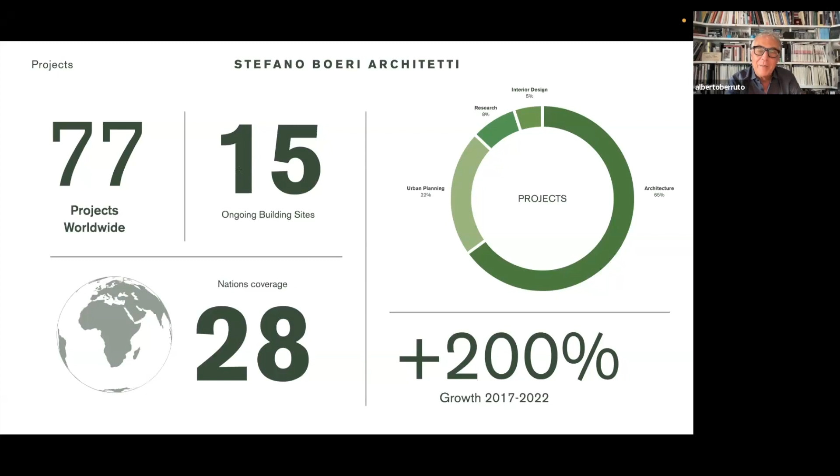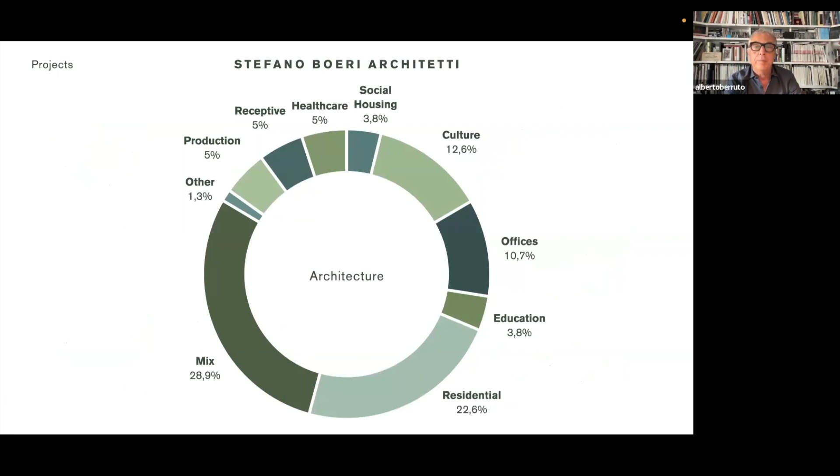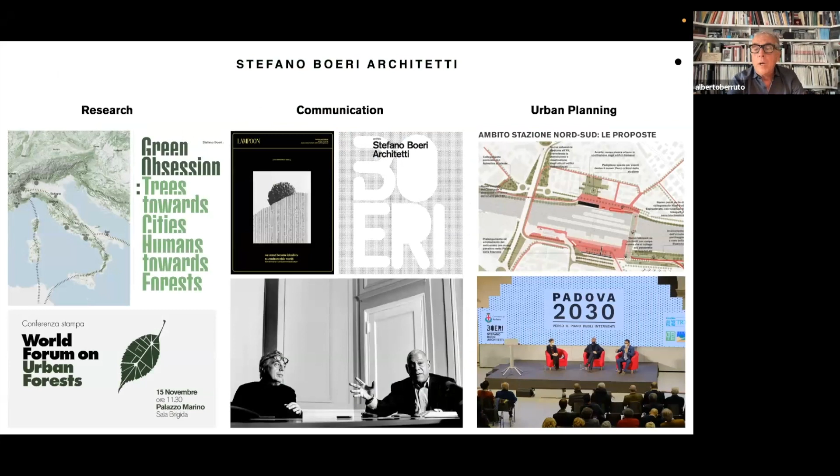Basically, all what we have done in the last years is in a certain way influenced by what we are used to call a green obsession. That means, in other words, that we are in a way obsessed by the idea to put together the urban sphere and the natural sphere. This is why we have developed projects, proposals, master plans, and also produced several research projects in this field. And this is why also, thanks to the publication of a book like Green Obsession, which was just awarded by the Sustainable Development Goals of the United Nations, we are trying not simply to introduce this necessary marriage between living nature and architecture in our theories, but also hopefully in our practices.

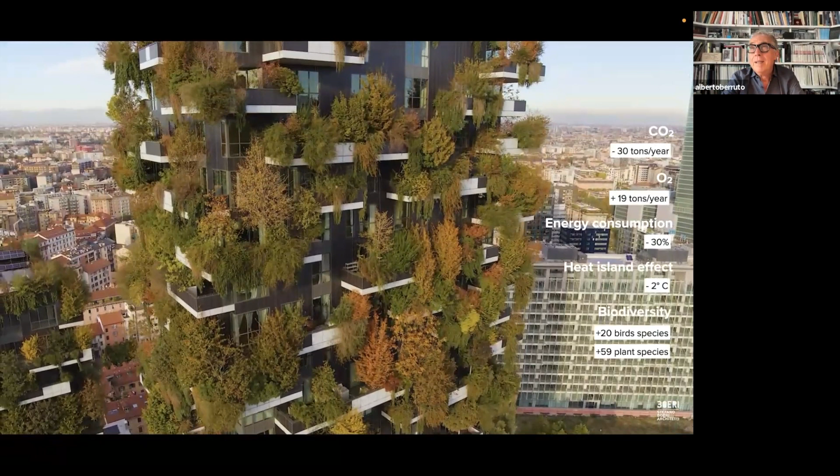Probably the most known project of this approach is the vertical forest in Milano. It's a building we built about 9.5, 10 years ago. But the first plants were moved from the botanic nursery to the construction site 12 years ago.

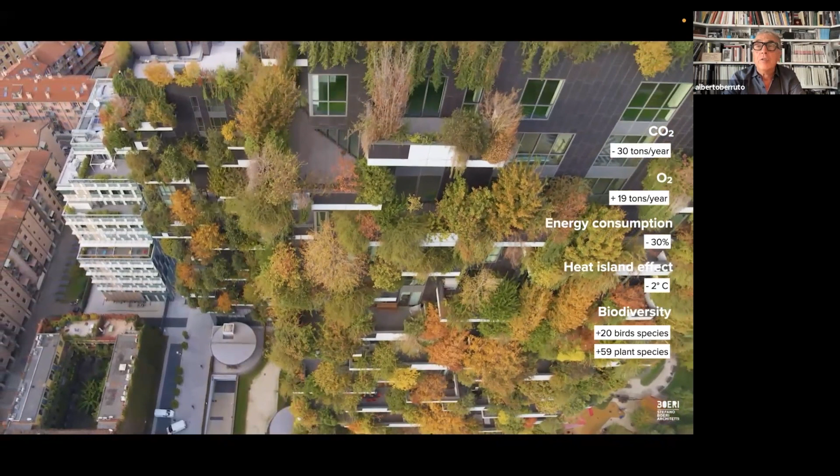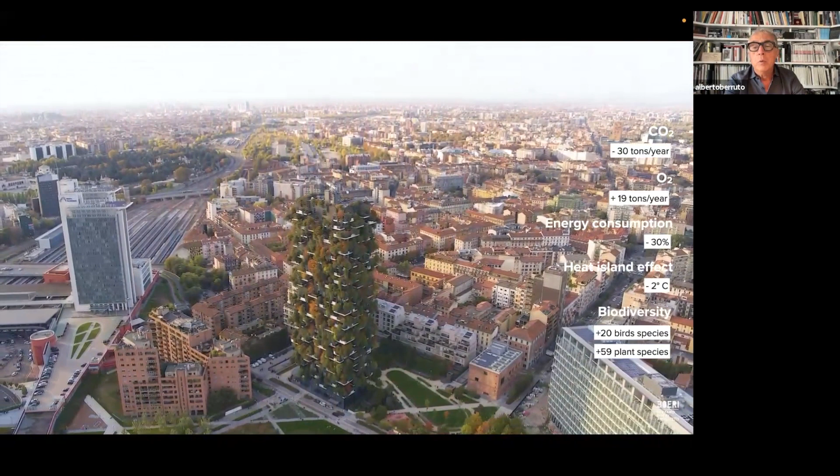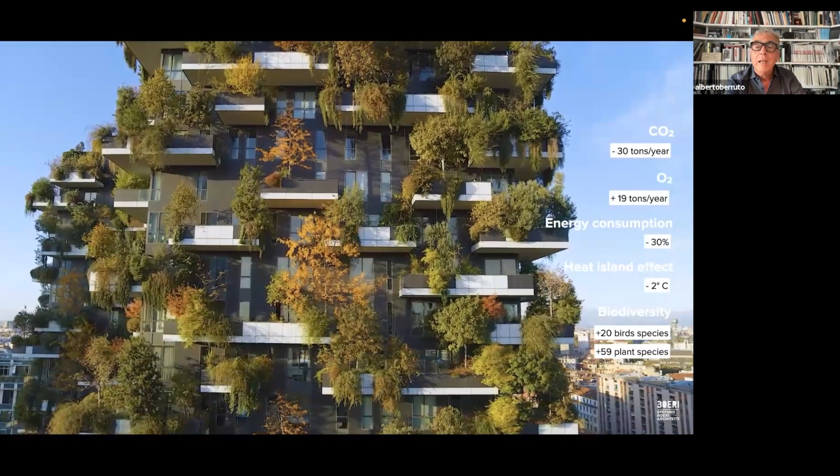That means that we have now a quite important case study where we verify and test all the experiments and improvements that we are experimenting with, in order to introduce evolutions and sometimes steps forward in the other vertical forests we are realizing as part of our work. So this building, as you know, is hosting basically 21,000 plants, more than 900 trees and shrubs of different species, and more than 30 different species of plants and trees.

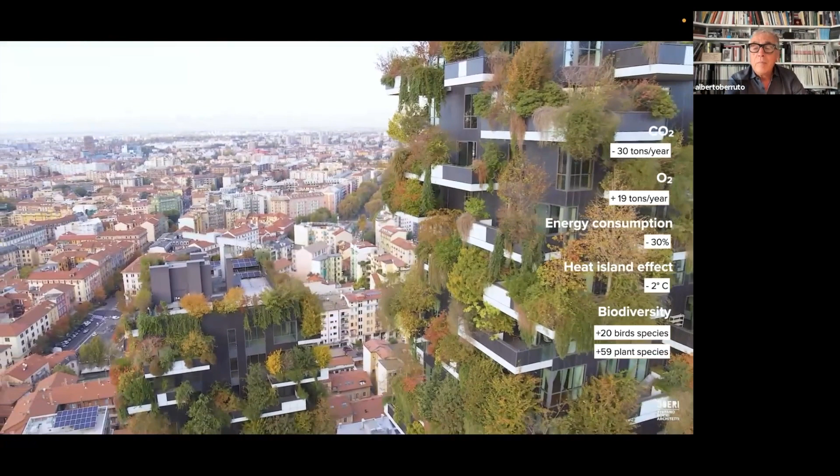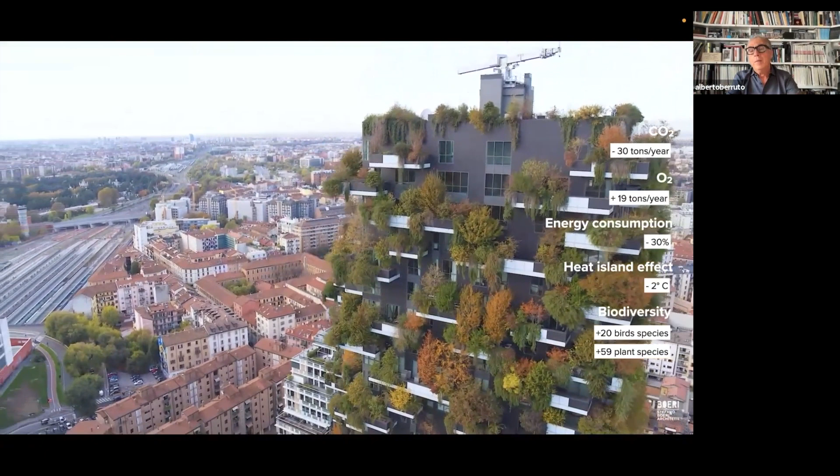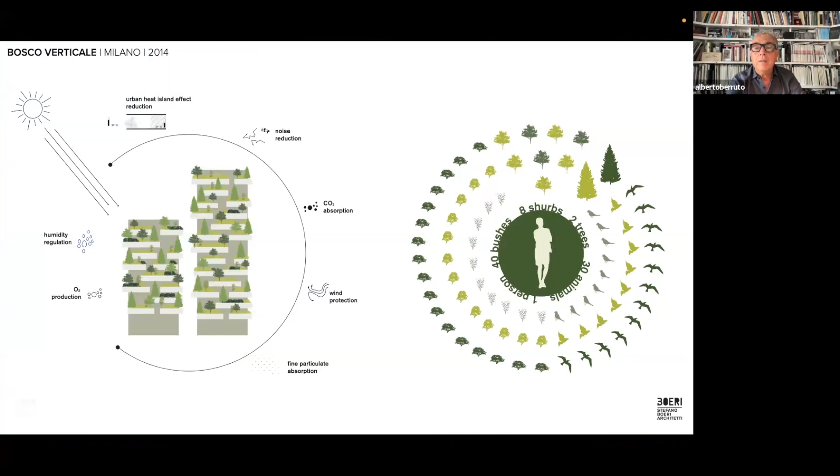And it's a building that also uses the water that comes from the underground city, and thanks to a system of very sophisticated water management, it can use a system of irrigation that at the end of the cycle puts the water back into the underground. It's a building which has many other characteristics that have also been appreciated by, as I was saying, the manifesto of the Sustainable Development Goals by the United Nations.

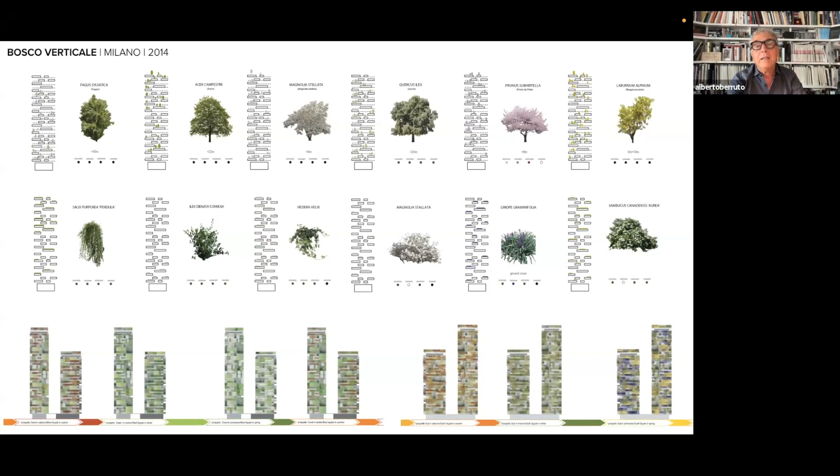And basically, it's a botanic garden. So what we normally do is select the species of plants in relation to the specific climate conditions of the site. And only at that moment, once we have selected the species, we start to design the facade of our building, trying to put all the plants in condition to grow in the best ways they need, and trying to respect their evolution trajectory.

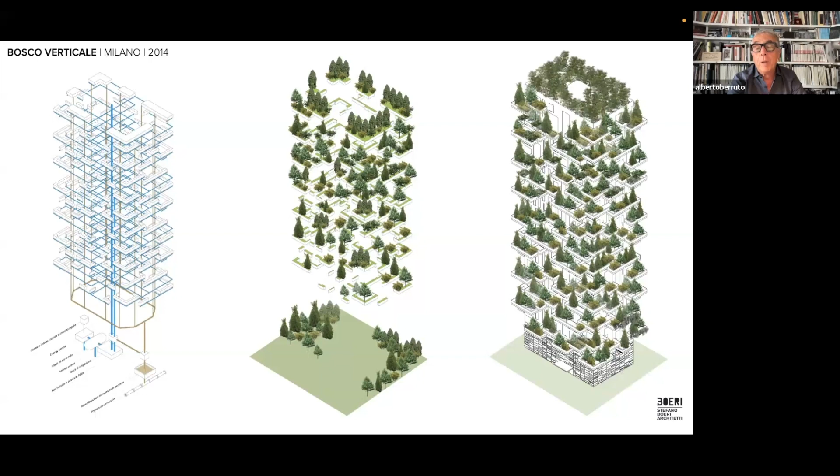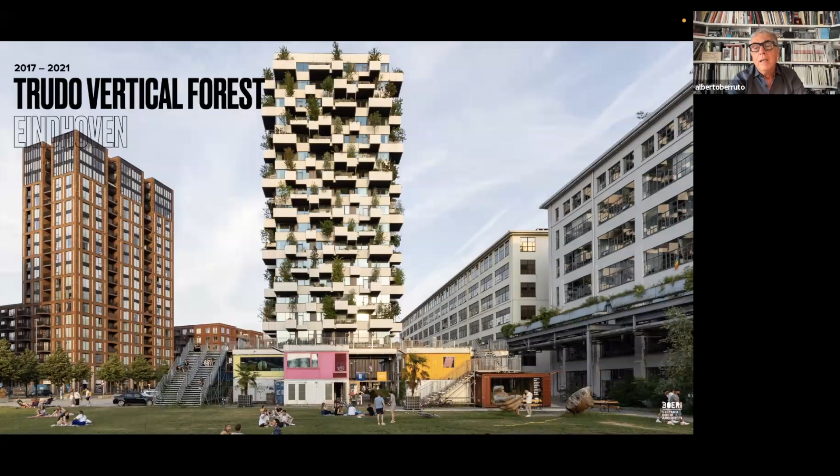This is more or less where we are now, realizing other buildings or settlements that have the same kind of character. One of the latest is this vertical forest we built 2 years ago in Eindhoven, Holland. And what makes this building so important for us, we are very proud of that, is that it is a social housing vertical forest. So it's a building for rent.

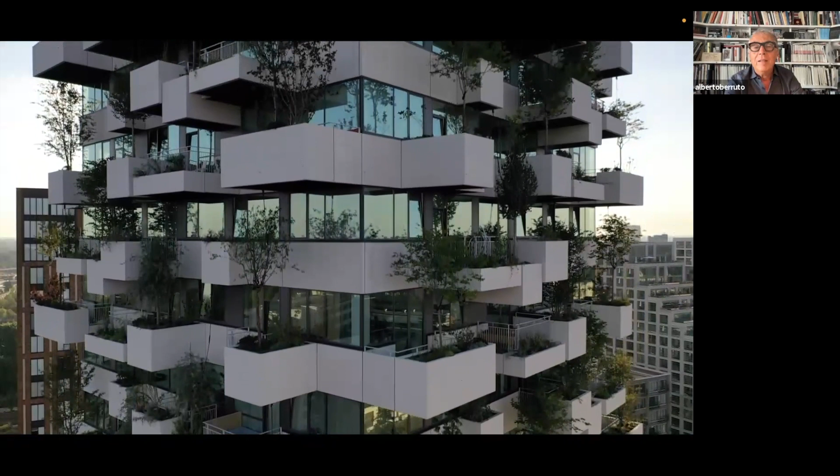It hosts more than 200 students. And the cost of renting an apartment is very low, and the construction cost is very low. So thanks to prefabrication, which we learned thanks to this experiment, this case study, we use it to consider our architectural experiments. Probably this makes our profession so intriguing, and also what we do so amazing, from the point of view of the risk that we take, but also the pride in the result. And that is a building that has, for the first time, introduced a very important number of trees and plants, but with a drastic cut in the construction cost of the building.

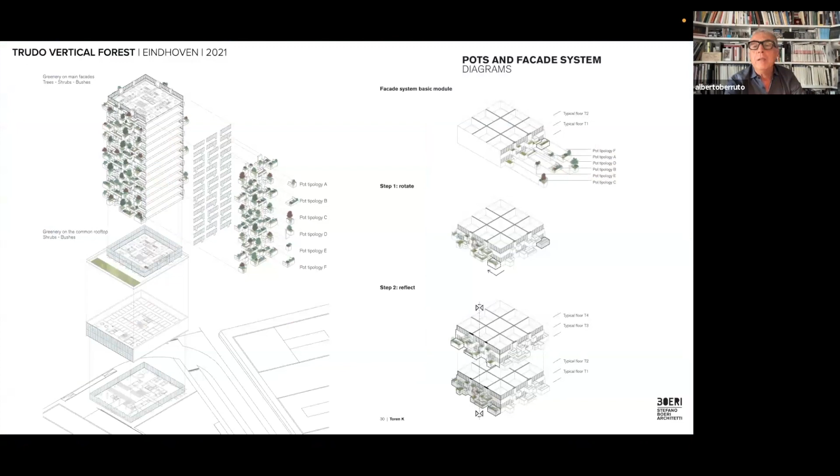You see here some diagrams showing how the building works and the distribution of the system of apartments all around. And it's so great to see how students decline the interiors according to their own desires and expectations, while conserving this relation with the external place.

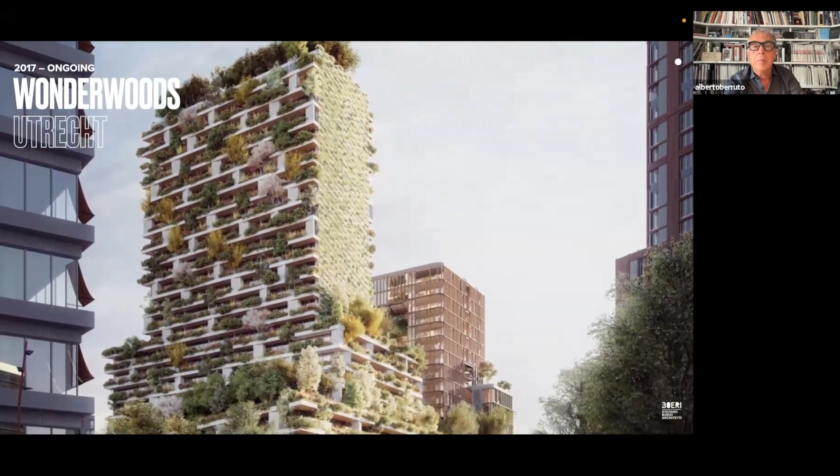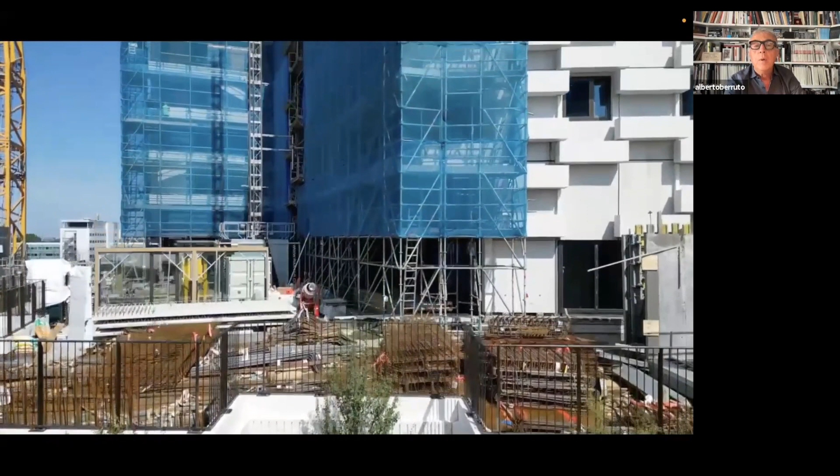That's another building which is in construction, not far from Eindhoven. We are in Utrecht here, and this is the building in construction. This is already built. Also in this case, you see the variety of species that we are introducing. What makes this building interesting is that it is a mixed-use building with a very important variety of functions. So the basement is commercial, then we have office building, and then different kinds of residential apartments, and that's again the building in construction.

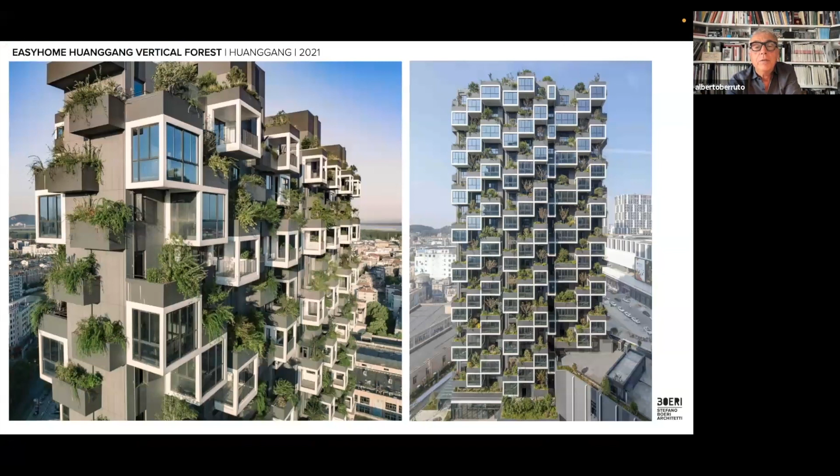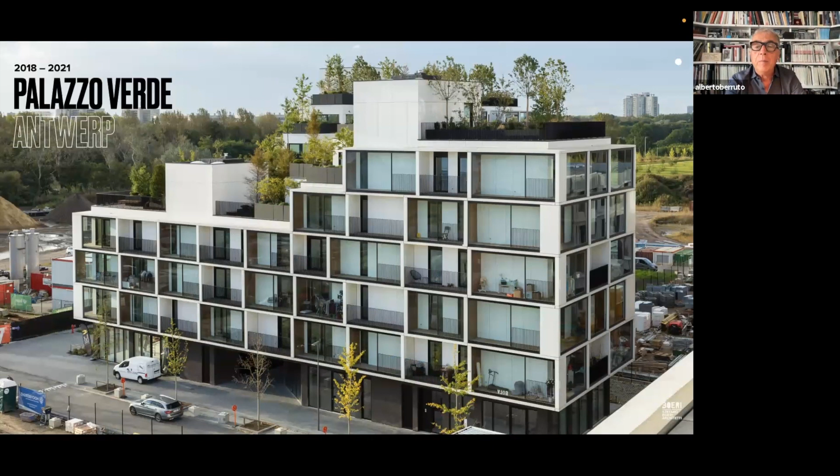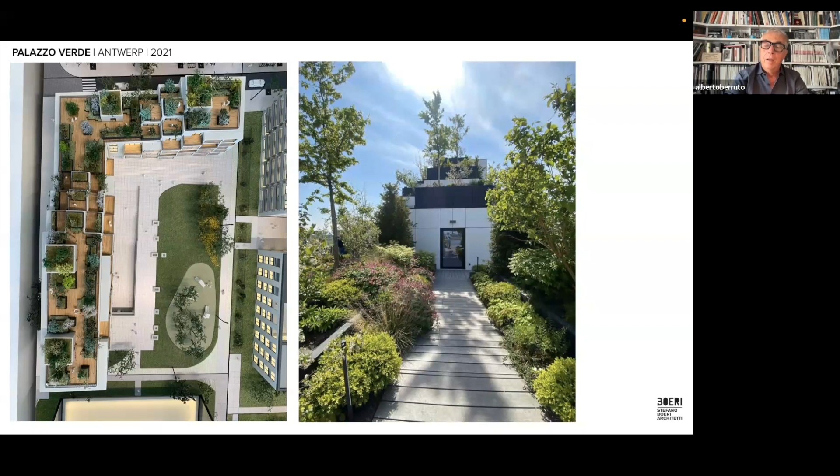But to enter more into the issue of the conference, the issue of rooftop and green rooftop, this is Antwerp, Belgium, not Holland. Here, for instance, we built three years ago a quite small residential environment. What makes this experiment extremely interesting for us is that it was the first time we used a very massive presence of plants of different varieties and species on the top of the roof, creating a collective space. So really, green, as happens with all our buildings, is a kind of common good that is completely available for all the tenants of the building, and this happens with this roof and its plants.

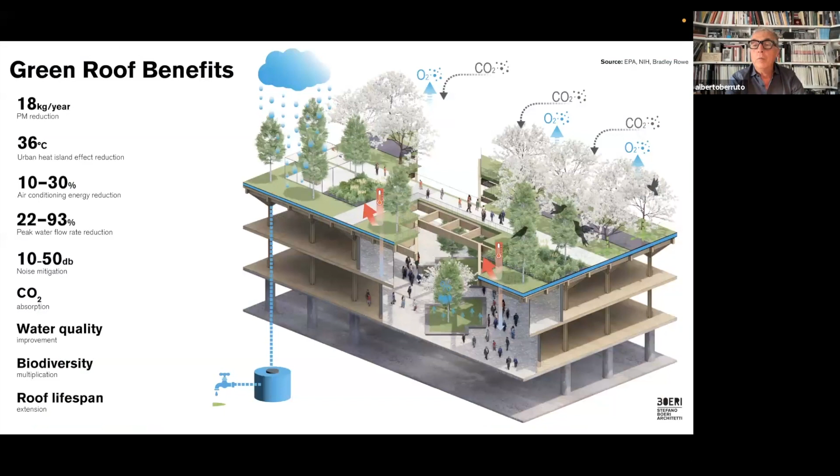And we know well the green roof benefits, so I need to go back to that: how in terms of water quality, respecting biodiversity, and other advantages, green roofs could really improve the quality of life of citizens.

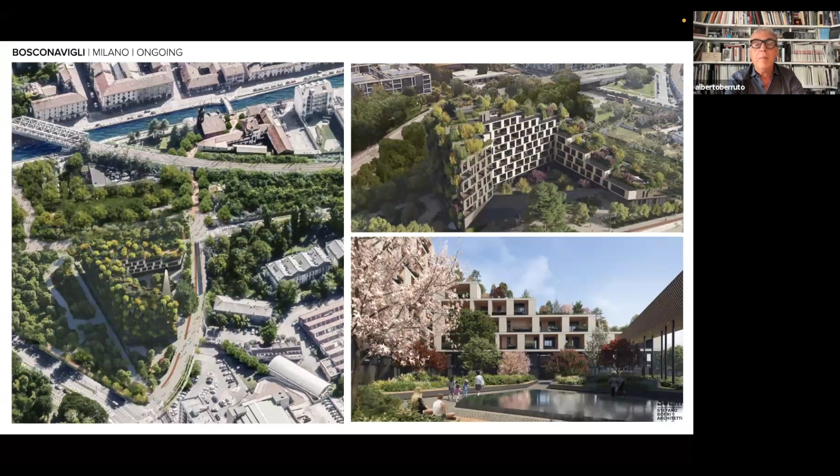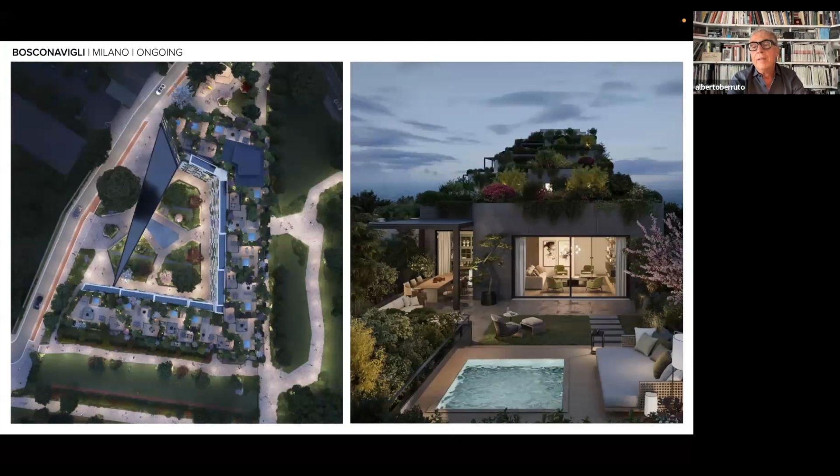This is a building which is in construction now in Milano, a variation on the vertical forest theme. In this case it's a courtyard. It's not so high, 11 floors at the top on the northern side, but it has a high number of plants and trees. Also in this case, what makes this building quite interesting is the presence of a sequence of green roofs distributed on all the branches of the building.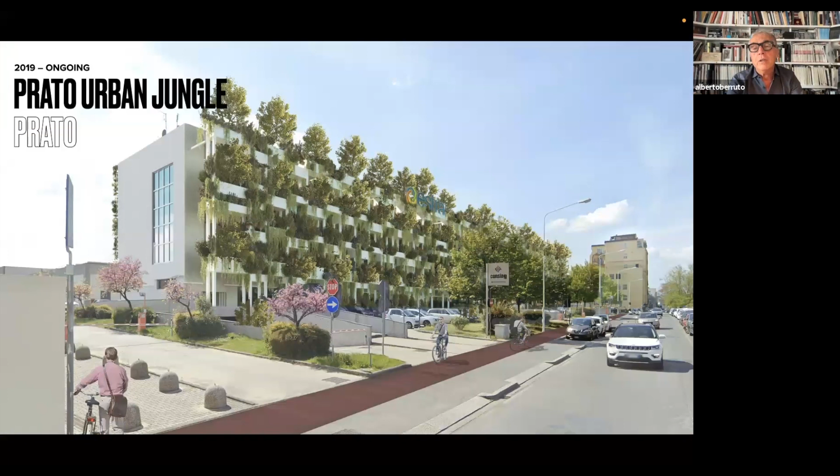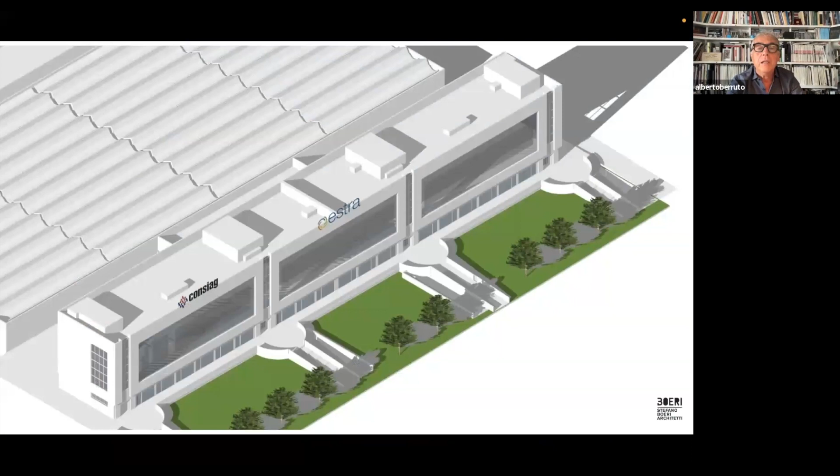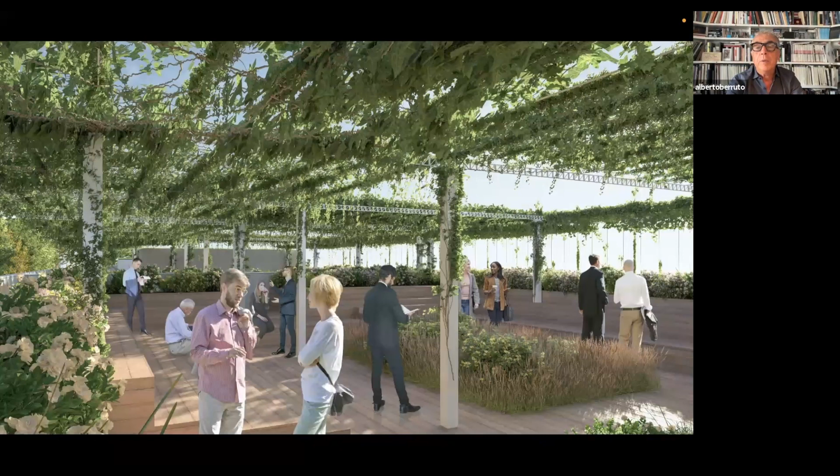If we want to enter another sphere, buildings that are retrofitted using green - that's an experiment we are doing in Tuscany, in Prato, with a not-so-old office building, which will be completely redefined by this autonomous green structure of balconies and loggias. We have done the same experiment in Brussels. We are now working there with the same issue, with a very interesting building, and this is a roof, again a green roof.

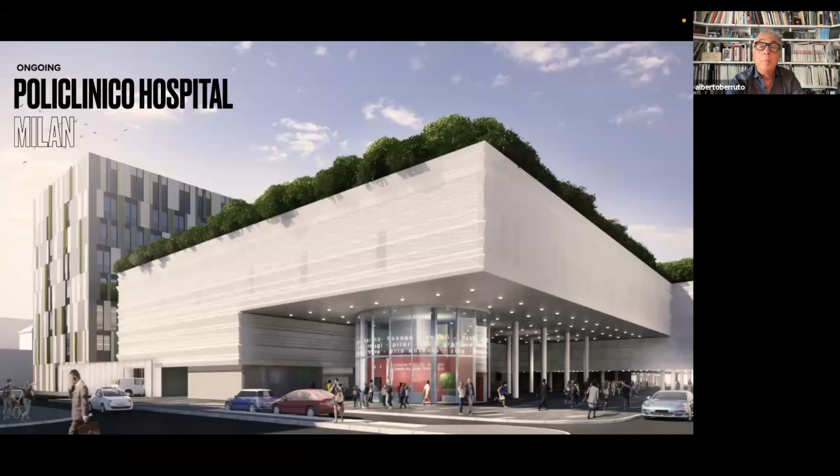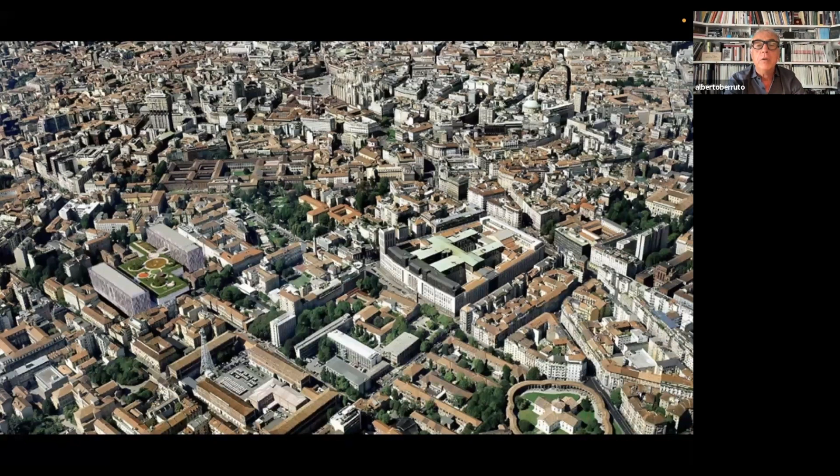But probably the most relevant experience we had on green roofs is the one we developed 14 years ago in Milano. We won a project, but unfortunately it's only in construction now, after 10 or 12 years. This project remains, in our opinion, extremely interesting because it has 7,000 square meters of roof garden that is there for therapeutic use.

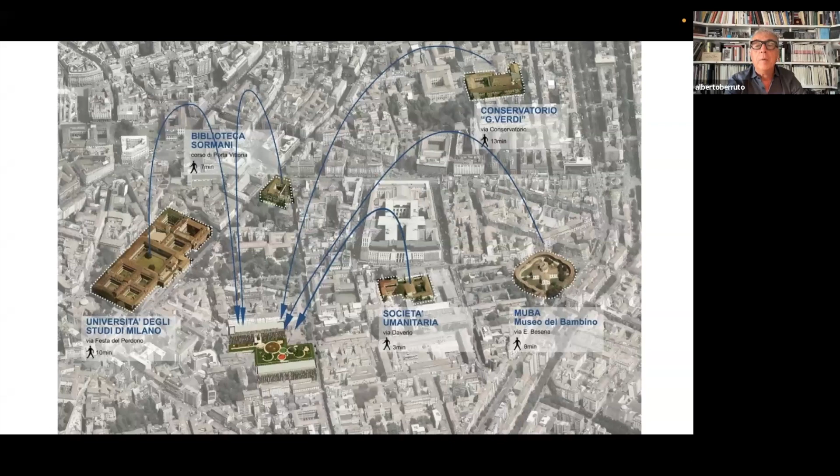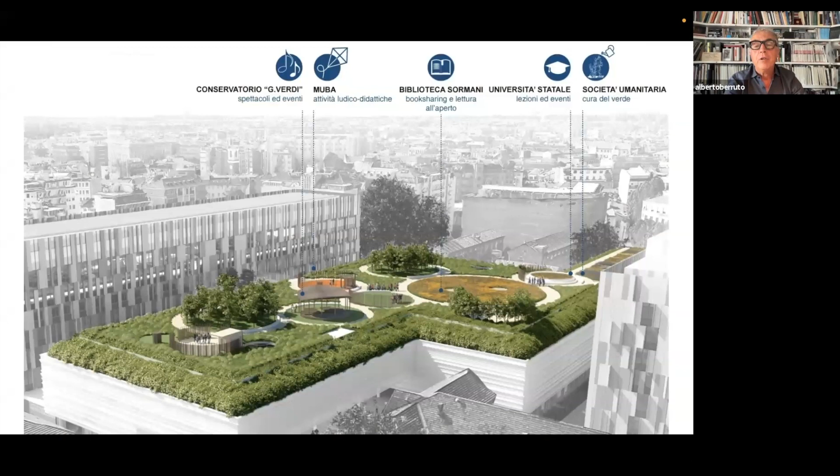We will have in the sky of Milano this kind of affordable green urban balcony at 25 meters. We are extremely proud of this, also in terms of its dimension and its relation with other public buildings in Milano. We believe this will become a kind of catalyzer of interest, not only for the patients and users of the hospital, but also for the citizens.

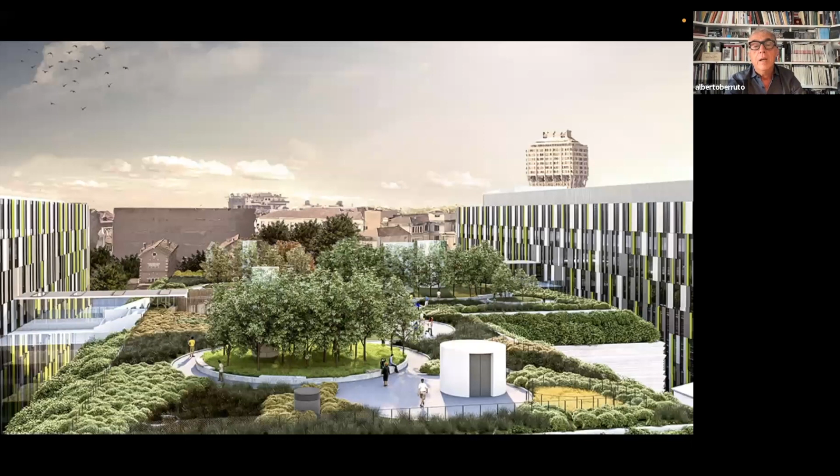Here you see some more detailed design of what we are planning to have on this green roof that will stay in the sky of the city.

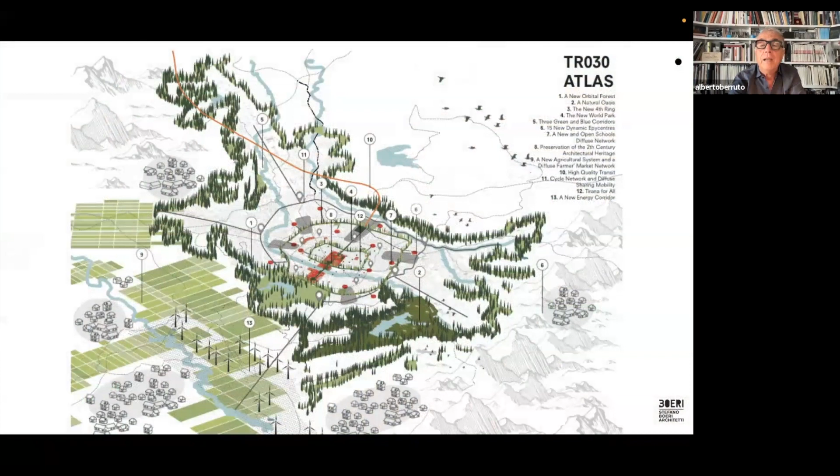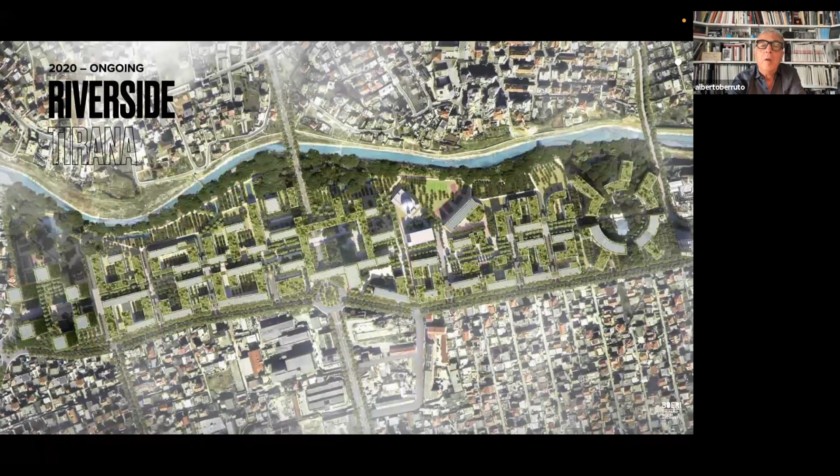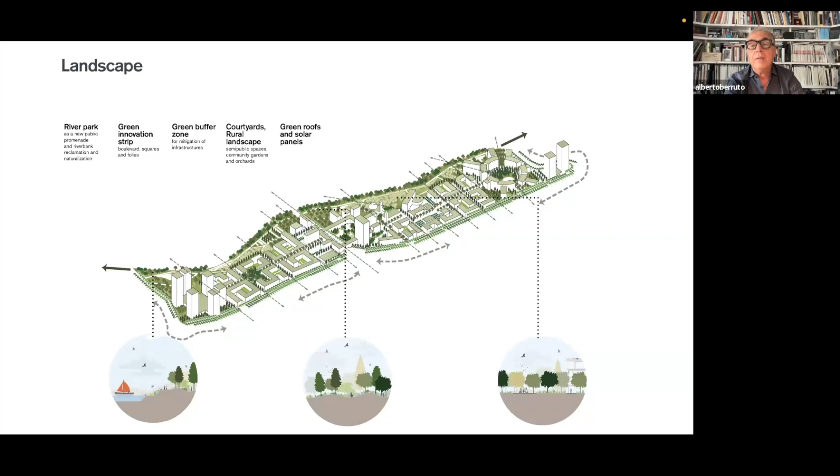Just to not forget what we do at different scales - this is, for instance, the project for the Tirana master plan that we did in 2014. I show this simply because after the 2019 earthquake in Tirana, we developed this riverside project that is in construction now. What makes this new district quite relevant, in our opinion, is not simply that it strictly respects this 15-minute city requirement, but that it's also a building that uses the rooftops as a common place, or collective public space. So rooftops and gardens are extremely relevant, meaning we will not have only a pedestrian, walkable life on the ground floor of the city, but also at the level of the roofs.

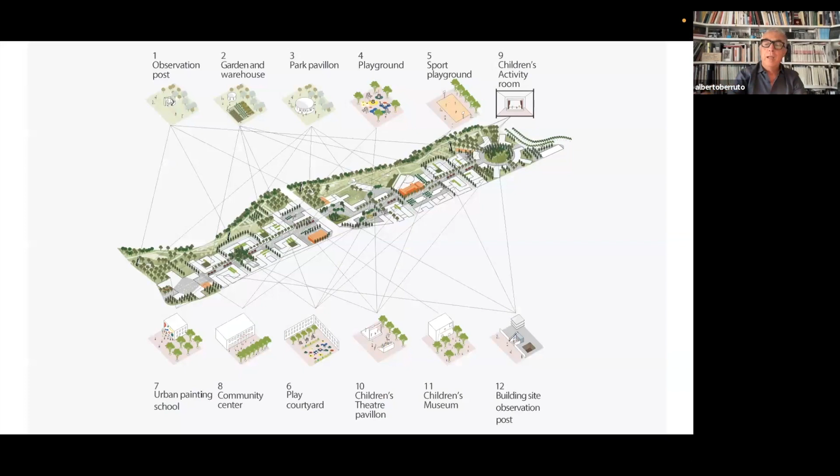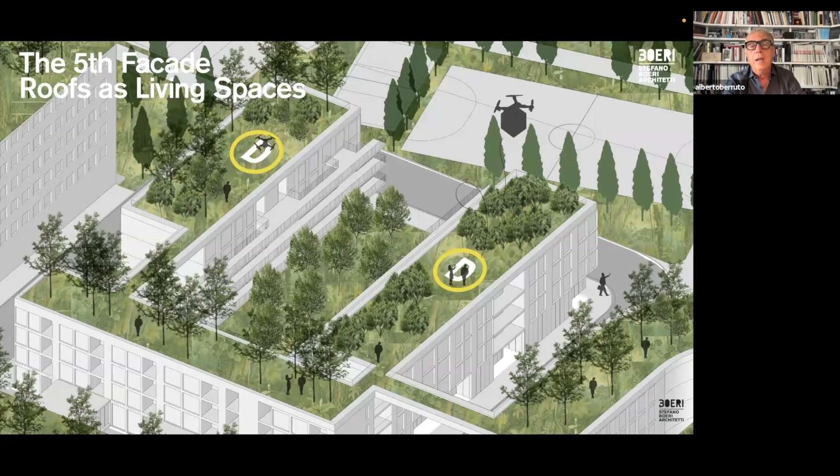This is why we are working so much on this, imagining that roofs will become, and are already becoming in a certain way, a kind of new entrance to the life of the building from different points of view - not only for goods, but in the future probably also for the tenants themselves.

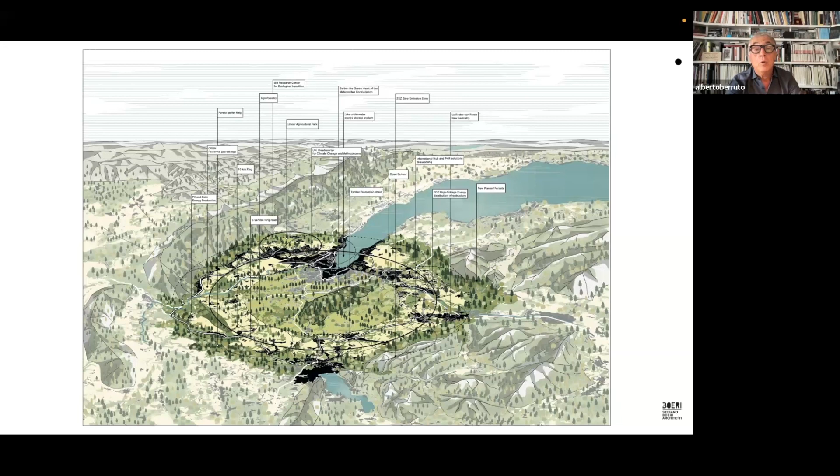Different scale also means experiments we are doing in other cities, like Genève. That's a project we developed some years ago - the idea of how we could imagine a vision for the future of Genève, Switzerland, where Genève is connected with Annecy in France, with this circle of forests and small urban villages superimposed on the CERN accelerator based in Genève. That will help the circular urban settlement system use the production of clean energy that the accelerator will have in the future.

What makes this project, in our opinion, quite interesting is that at the center of this new metropolitan environment, we don't have a historical center. We don't have a square. We don't have a synagogue, a church, or a mosque. We have a mountain. This is the idea of how we can have at the core of our city a natural monument, a natural element.

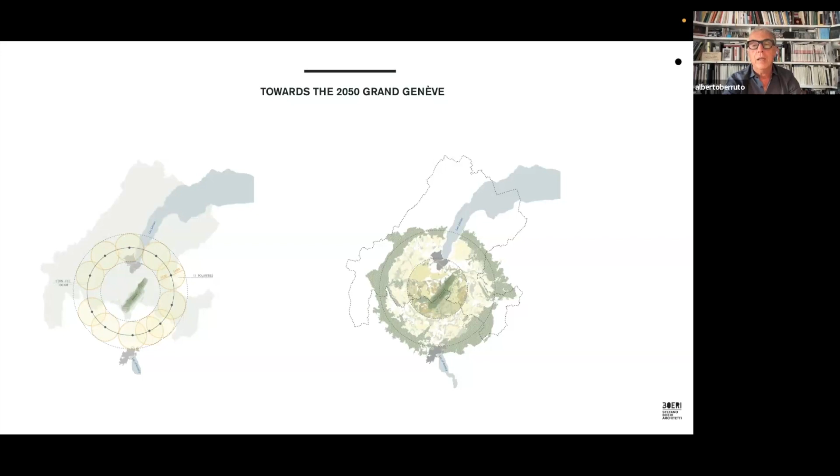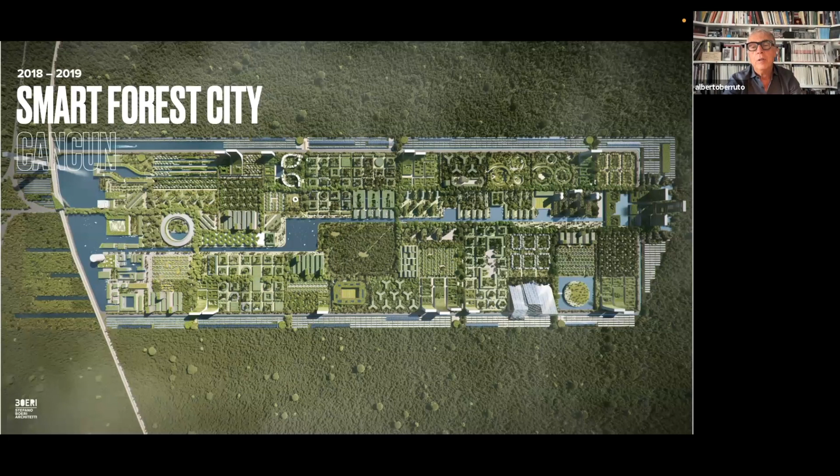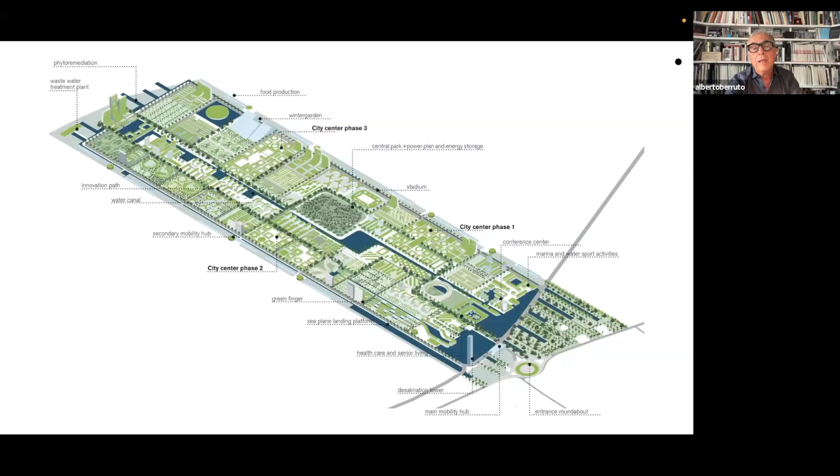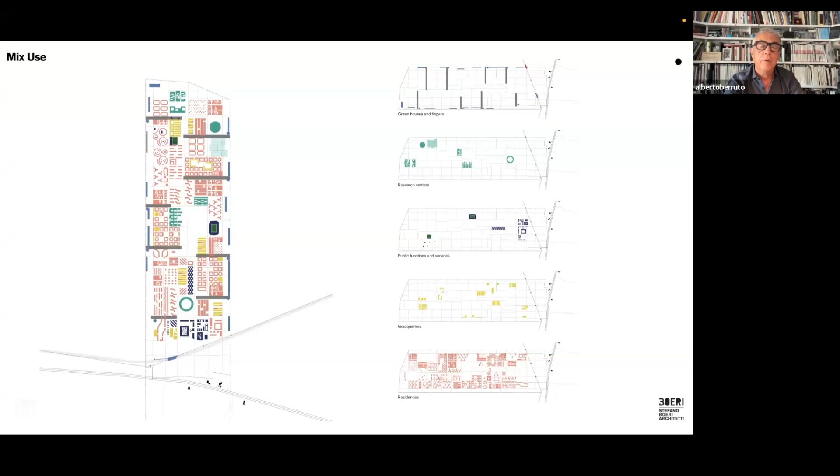That's another project we are developing in Mexico. It's a forest city on the site of a huge horizontal concrete platform that was built expecting to realize a mall that was never built. We were asked to substitute and intervene in order to go back to nature, and that's what we are proposing: a system of universities, centers, and research centers, all in different variations related to green buildings, with very important attention to desalinized water maintenance and circulation. All this is also an aspiration to have relevant energetic self-sufficiency with this buffer of solar panels all around. You see this also in southeast Mexico, in Cancun.

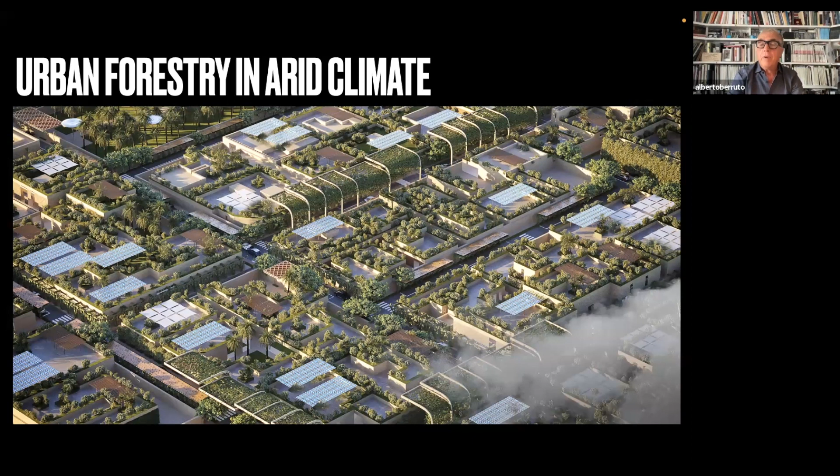But we also started to work in arid climate environments, arid climate and urban environments. What we have done is to create a kind of manifesto where we are putting together all the instruments and tools, the ideas we could have to make arid climate urban environments cooler and with less heat island effect.

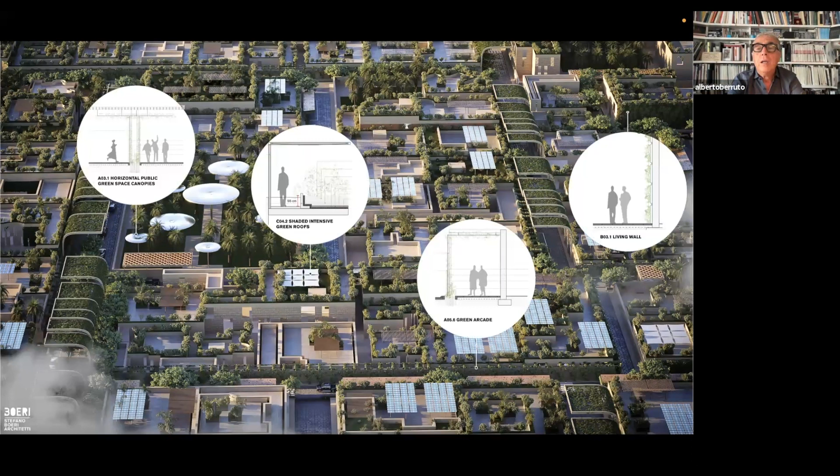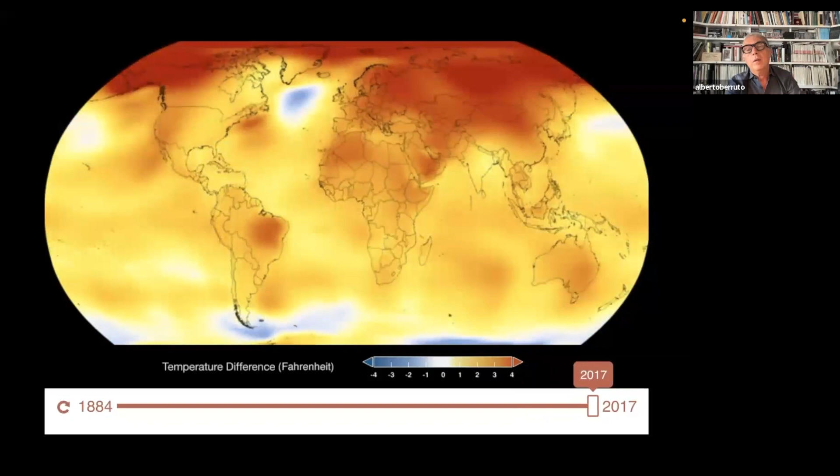Here you see some of the devices we are now proposing, a system of solutions that can be added and combined together in order to change the quality of life of the city, and to try to deal with what will become the future — probably one of the main issues related to global warming and climate change: the fact that part of our territory will become unlivable. That's the reason to pay attention to what is possible to do now in desertic and arid regions, in order to make this solution affordable for cities that will become arid in the near future, like North European, or South European, or North African cities.

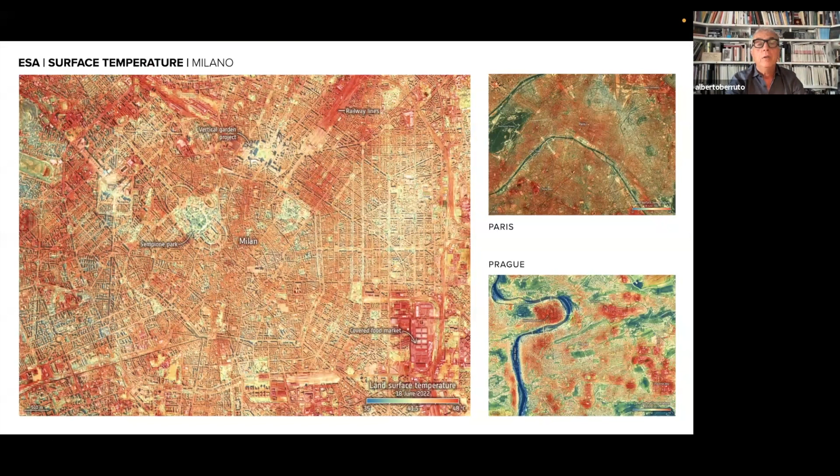This is Milano, for instance. That's an image of the surface temperature last June. There's also a way to show, thanks to a satellite view with thermal surface imaging, how the vertical garden project is amazing in terms of its capacity to reduce the heat in this part of the city.

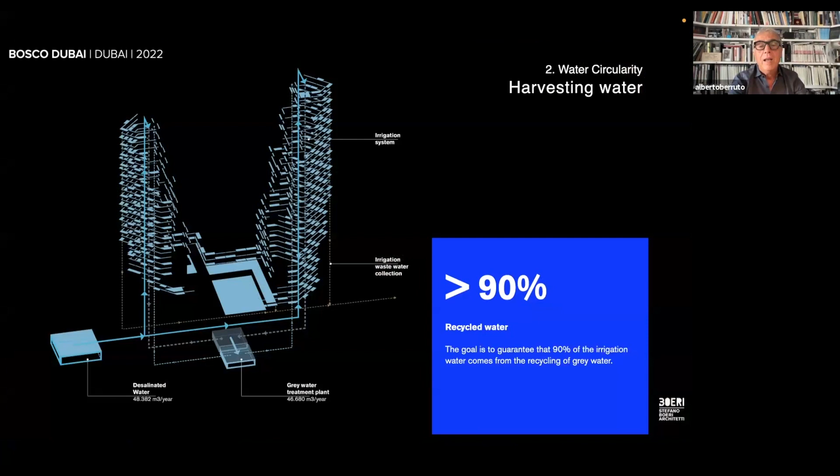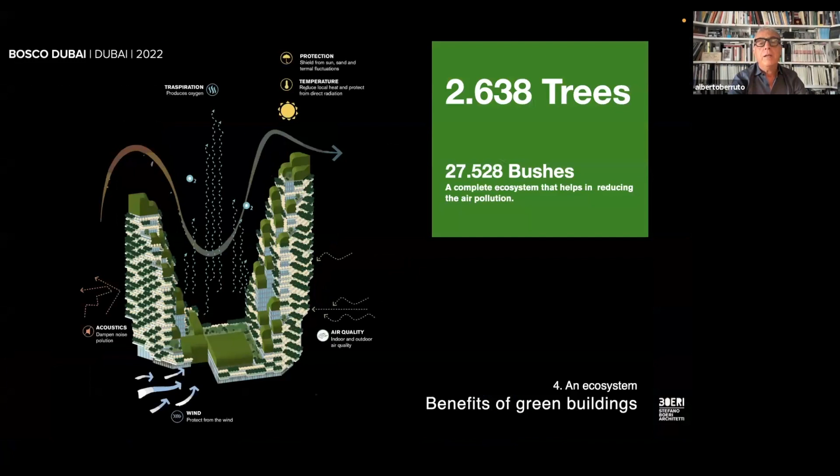Just to finish, to conclude, this is a project that we presented last year at COP in Egypt, and it's a project in Dubai. What makes this project important for us? It puts together water management, a very large surface for solar panels, and also agricultural cultivation. All this together in the city of Dubai is such an amazing challenge. But again, it's a way to start to do our best.

And now we are preparing the second edition. I really hope you have the opportunity to come and see how today an enormous number of cities is sharing experiences and projects on this issue, on this field. So I hope to meet you in Washington next October.

What we will do in Washington will be to show our project, our master plan, but also a project we are developing for Italy. You probably know this amazing idea developed by Richard Weller, a colleague teaching at Penn University in the United States. He says that one of the steps we should take in the future is to put in connection all the biodiversity hotspots present in the world.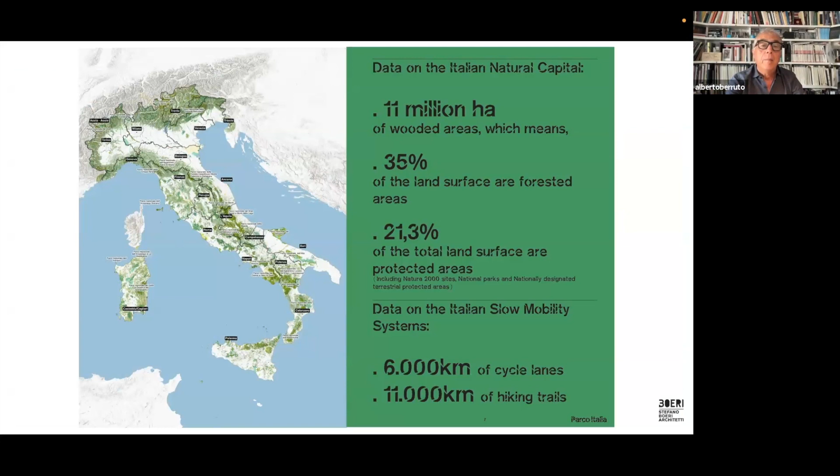We know that Italy is one of the most important hotspots of biodiversity, and that's why we are now working to connect all the natural areas, natural parks, and biodiversity areas around the maritime and land territory of Italy, with biodiversity corridors and walkable paths that will create a new condition. We know well that biodiversity and connectivity are the two pillars of what has been done in a place like Italy, where we need to connect these biodiversity hotspots in order to multiply their advantages.

On the climate condition, on biodiversity, and on lifestyle for all citizens. Here you see an image of the project that is, at the moment, probably one of the most advanced projects we have developed for Italy. Urban forestation capacity, to imagine making cities greener by introducing a very important number of plants and trees, is combined with the creation of these suburban, or completely peri-urban, green and biological corridors.

Thank you so much for your attention. I repeat that I would be more than happy to join you next time to have the opportunity to meet all of you. And really, really thank you so much for your kind invitation.